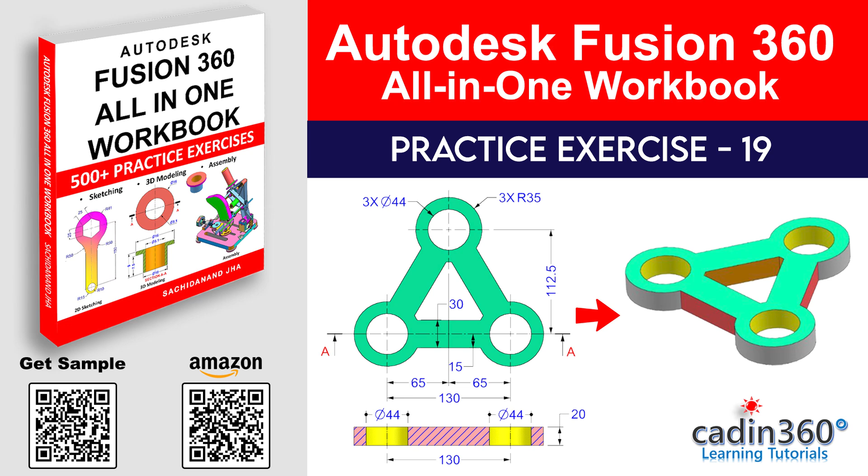We are going to complete this exercise 19 in Fusion 360. Let's start. First, activate the sketch tool, then select the plane. Next, draw these circles.

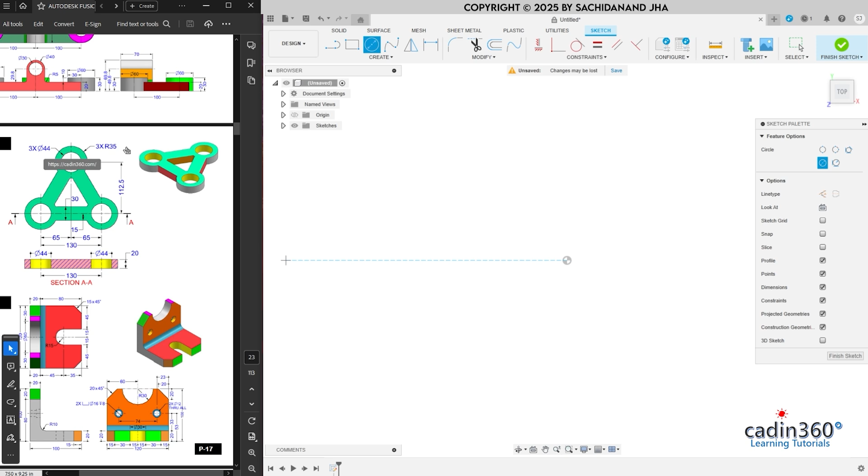These circles are of dia 44 and R35, meaning dia 70. So draw two circles, 44 and then 70. We are using shortcut C for the circle and D for dimensioning.

Here it is 65 from center, so we are assuming this origin as a center, so its value will be 65. We are aligning it horizontally to this origin, so it is fully constrained.

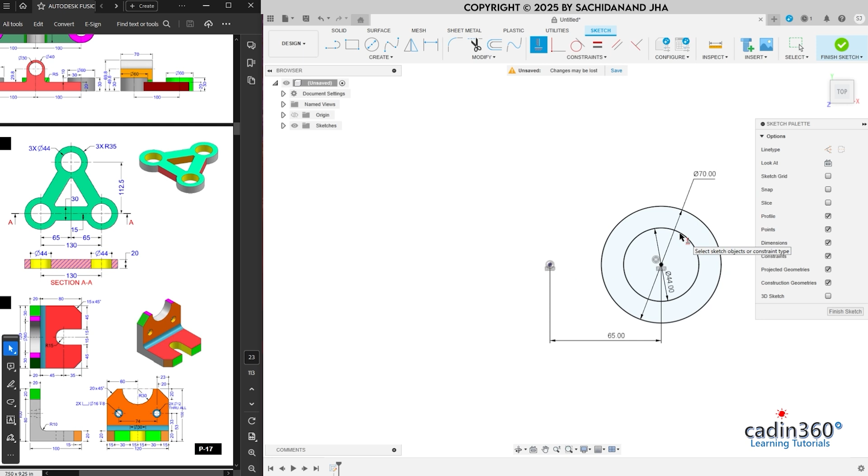Similarly, we will draw this side too: 44, 70, make it horizontally aligned to this, and then dimension it, which is 65.

Now again 44 and 70, align it to here and specify vertical distance, which is 112.5.

Now we have to draw lines which are parallel and 30 mm apart from each other, 15 from this center line upside and downside. Same thing will happen on this side also, and this side also.

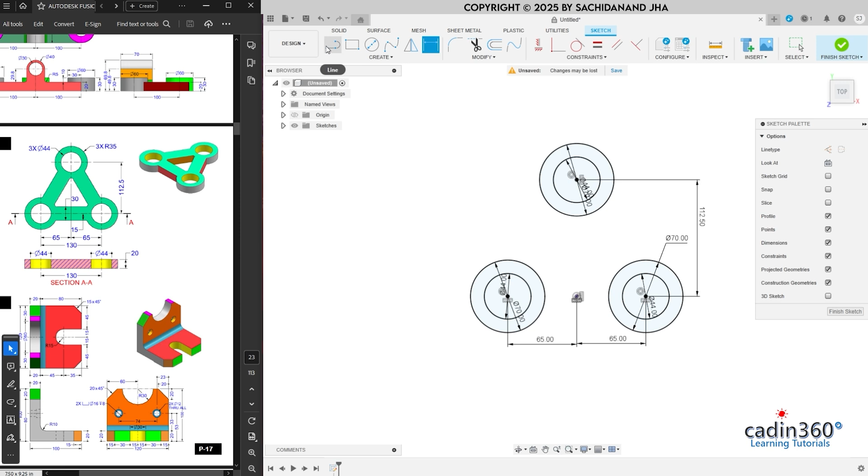To do this, simply activate the line tool, then draw three lines center to center, then use the offset tool, select this, and offset it 15 on both sides.

So this is outside offset and this is inward offset. Now we don't require this, so we are going to delete these center-to-center lines, and we will trim the unwanted lines.

The shortcut for trim is T. So trim this one, trim this one.

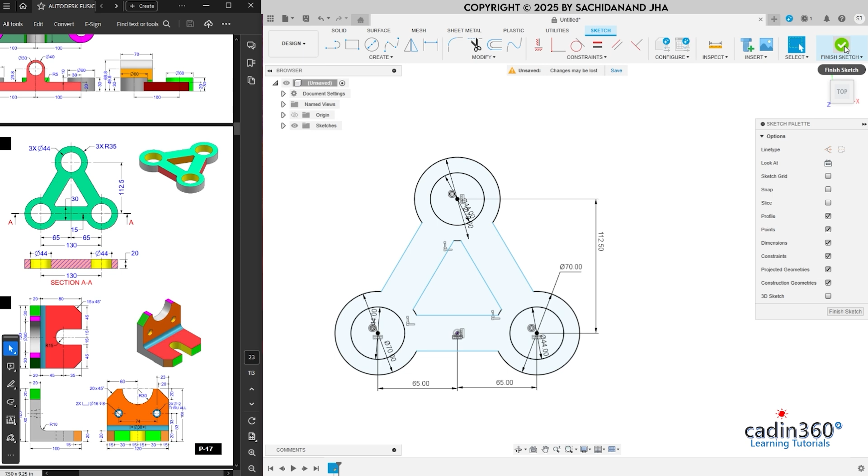So here we have our 2D closed profile. Then we will exit from sketch tool, and now what we have to do next is use the extrude tool, which has shortcut E. Select the closed profile and then specify the height, which is 20 mm.

20 mm, enter. This way you can create a similar model in Fusion 360 using these dimensions. That's all for this video. Thank you.